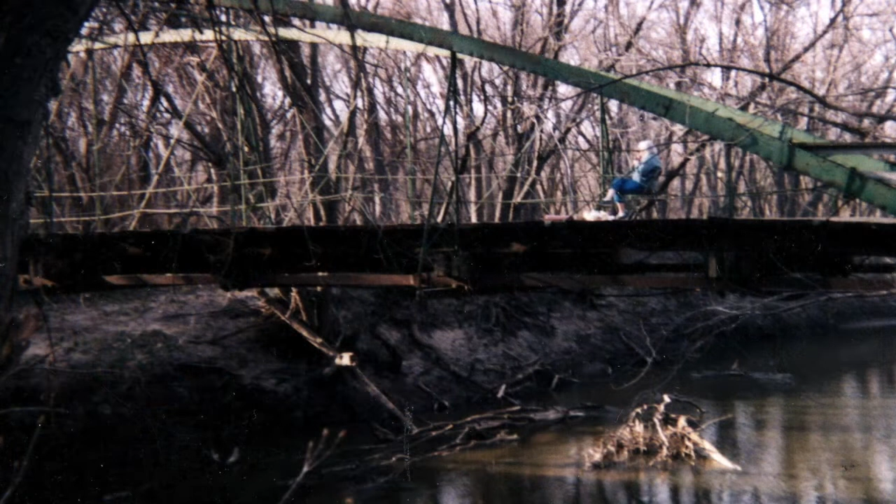When the McIntyre Bridge was flooded off of its piers in August of 2010, probably Friday the 13th, there was 10 inches of rain, and the story goes that trees threatening a bridge upstream were being plucked out and pushed back in the river, Iowa, and tiling, flooding, clearing fields all the way to the riverbank.

So our bridge lost it, and my dad was lucky enough to be up in a plane flying over as Laren and I were traipsing through muddy trails to get down to see if the bridge was still there. And it was not, and that's how we got started.

So all of the sources, Bridge Hunter, etc., pointed us to Michigan. And in Michigan, we were pointed towards Vern Messler and Nathan Holth. And they came to Iowa and talked to our friends group, and we had a good meeting on the fact that we could save our bridge, even if it fell in the water.

The expert that we really needed, however, was Nels Raynor of BACH Steel. We needed an iron expert. Our county engineer had said that one cannot weld old iron and no one rivets anymore, and this bridge cannot be saved. That was before it fell down.

But we got the bridge out, and we took it to Michigan. We brought it back from Michigan because the state threatened us with losing our status on the National Register and not being eligible for grants, and then they took that away from us anyway because they said when the bridge was moved, i.e. being pushed off of its piers, it lost all of its status. And that was a bummer.

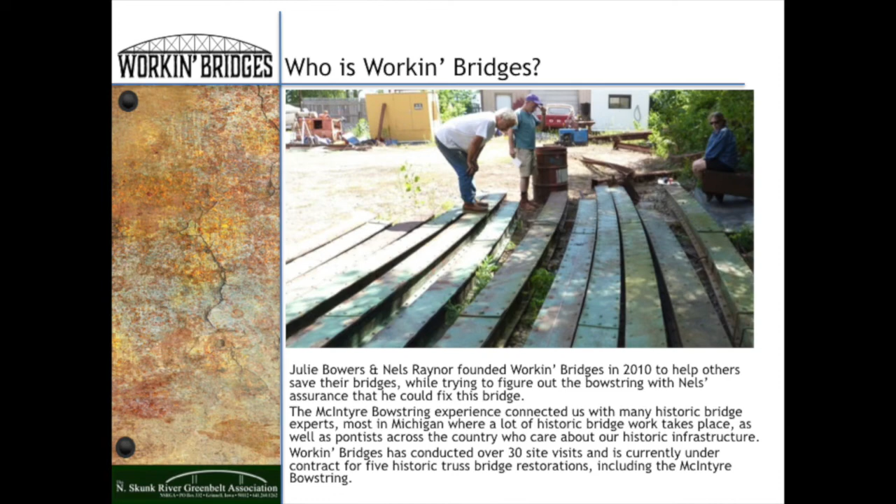So Nels Raynor of BACH Steel and myself, Julie Bowers, founded Workin' Bridges in 2010 under the auspices of the North Skunk River Greenbelt Association.

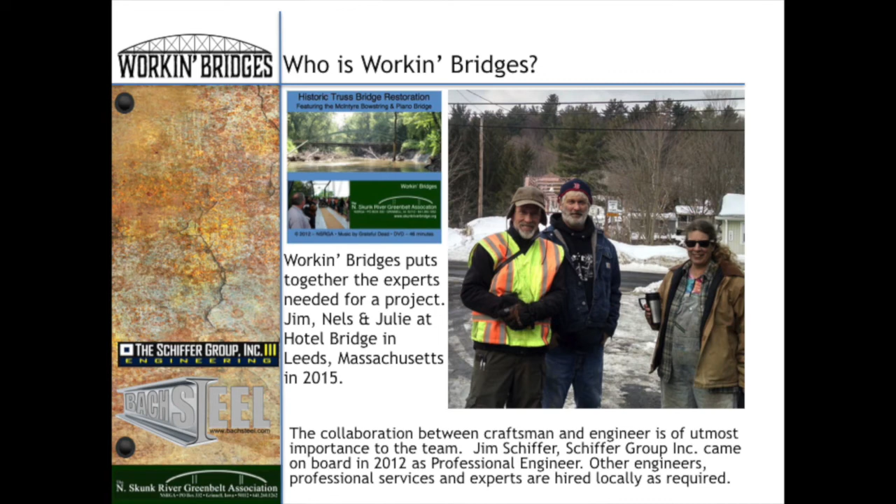And we did site visits, and we did estimates and timelines. We hooked up with an engineer, Jim Schiffer, who really gave people what they needed if they were going to try to save a bridge at that point, which was a pretty accurate anticipation of the cost needed for a bridge, if they could fund it in the first year. If it doesn't get funded that quickly, well, forget about it.

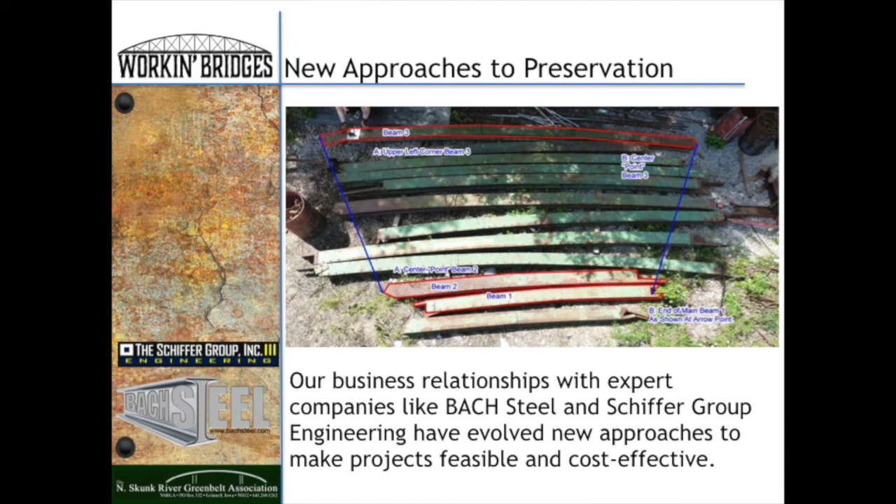So we had a nonprofit. We were working with experts, and we did all the usual things. We held bridge fests and events, and we tried to raise money.

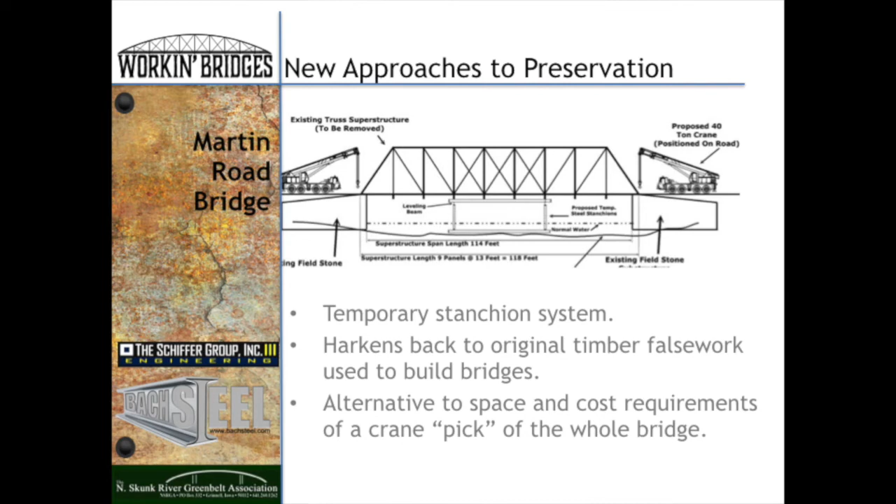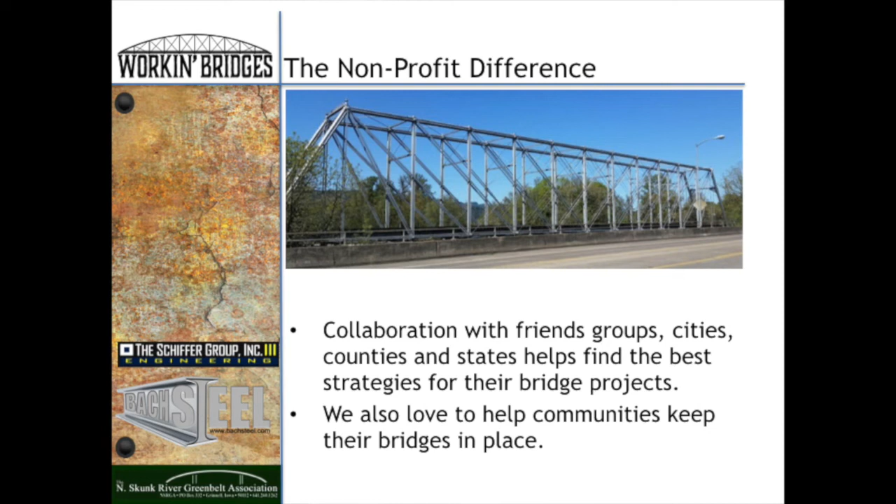But in 2015, we found the Hayden Bridge. It was threatened with demolition. It was in Springfield, Oregon, in Lane County, just outside of Eugene and over the McKenzie River. And we thought we would be able to help people in this community save their bridge. We ended up saving it ourselves.

Oregon is very committeeized, is how I put it, and the grassroots efforts have been somewhat squelched for these committees that then work with the local governments. We were never able to get an audience with Lane County unless we went in for 3 minutes at the beginning of a meeting in order to try to tell them what we were doing. So we had very little political support, even though what we have there is one of the oldest bridges in Oregon, and certainly one of the oldest train bridges that is still standing.

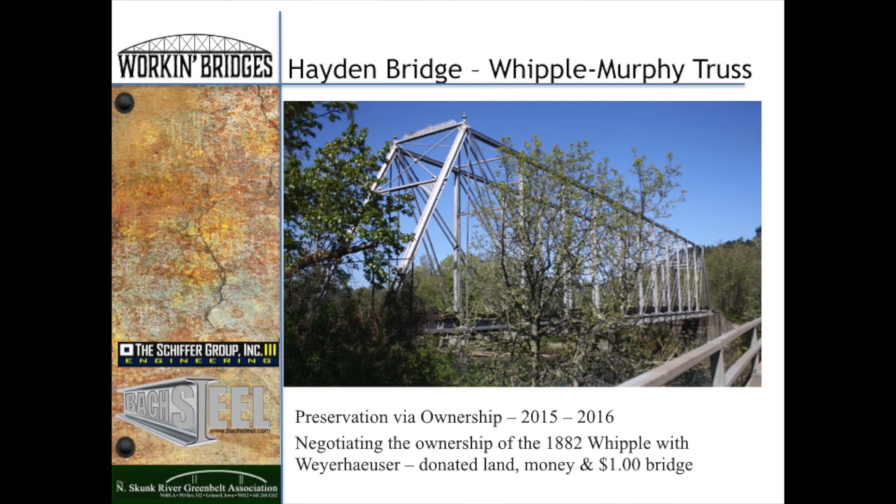So our approach to preservation was to try to help others. We saved another Oregon bridge, the Portland Waterworks Bridge. That was no longer needed to transfer water from the Sandy River to Portland. That is in Delaware, as well as our bridge, which is now the heart of Delaware's newest state park.

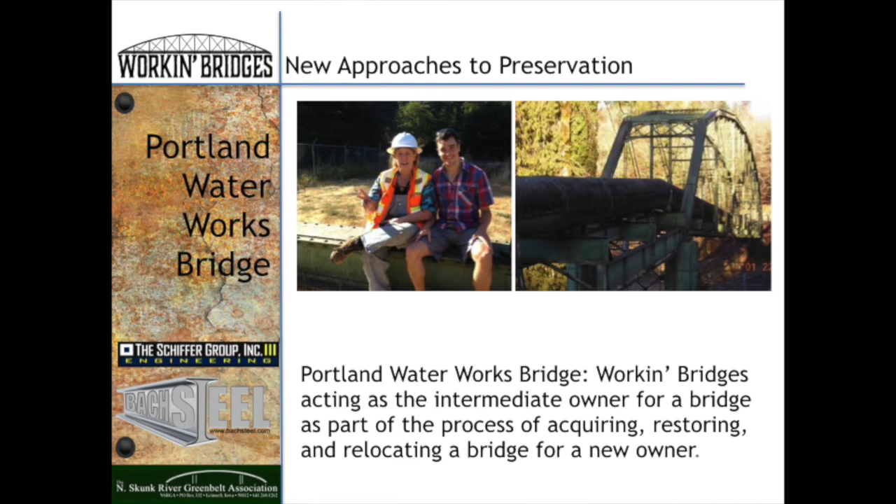We purchased this wonderful bridge, and we proceeded to figure out permitting with Lane County, which ended up with no permits needed. They couldn't quite figure us out ever.

Such wonderful views. That's where the horse went across during the movie Shenandoah, right in the opening credits. They rigged from the bottom of the bridge.

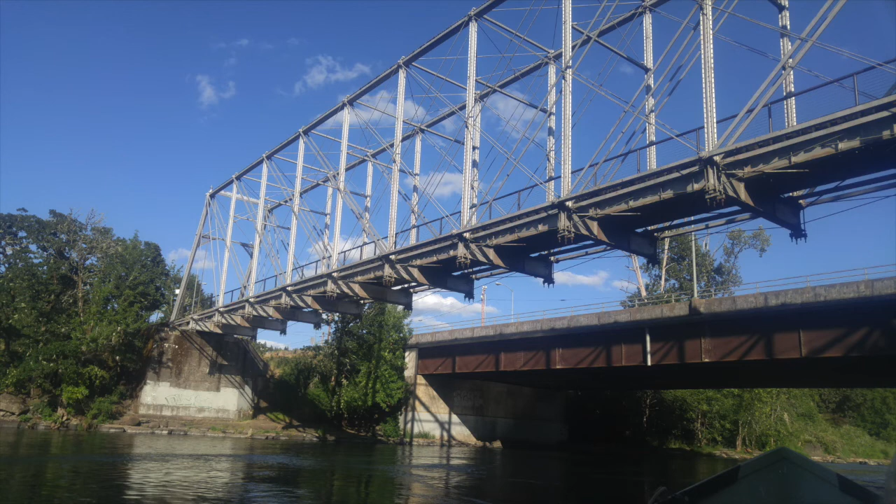It's a beautiful place. So we started doing our research. We made a site visit, Nels and I, and put together a package. Tried to figure out what the bridge needed, and it really didn't need any ironwork, if you will. It just needed deck and rail.

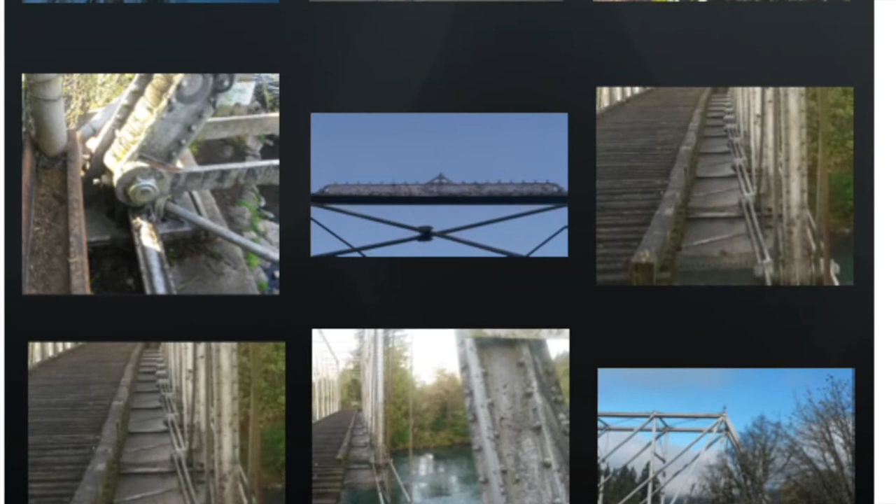The story goes that in 1868, David Reeves recruited noted bridge engineers Thomas C. Clarke and Adolphus Bonzano to establish a bridge design construction firm that would offer bridges made from Phoenix iron. This was called Clarke, Reeves and Company. Phoenix iron had been invented and patented in 1862 by Samuel Reeves as a wrought iron alternative to the cast iron compression columns that were used in building and bridges at the time.

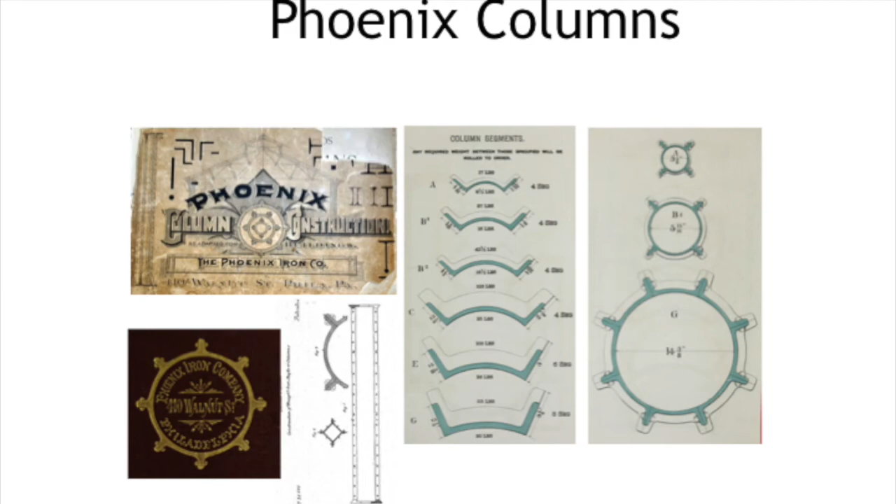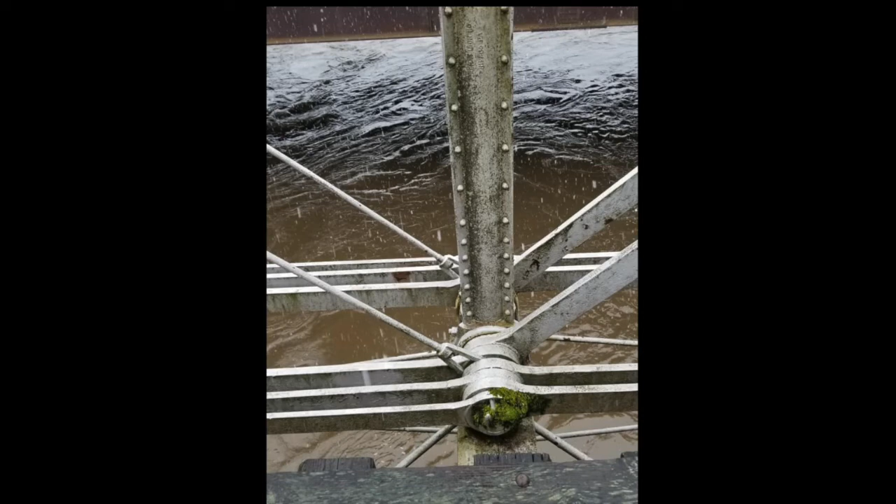Here is an example of the Phoenix column as manufactured by Phoenix Iron Company in Phoenixville, Pennsylvania. Then after 1882, when the Hayden Bridge was built, they changed their name to the Phoenix Bridge Company in 1884.

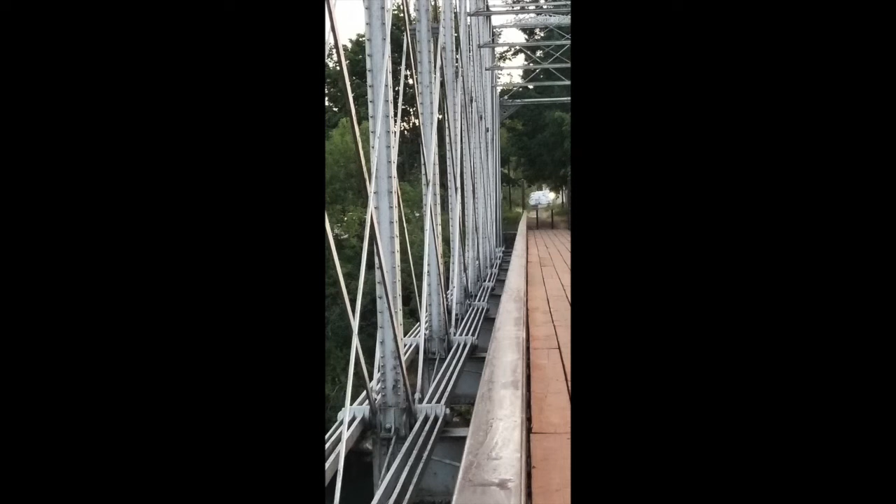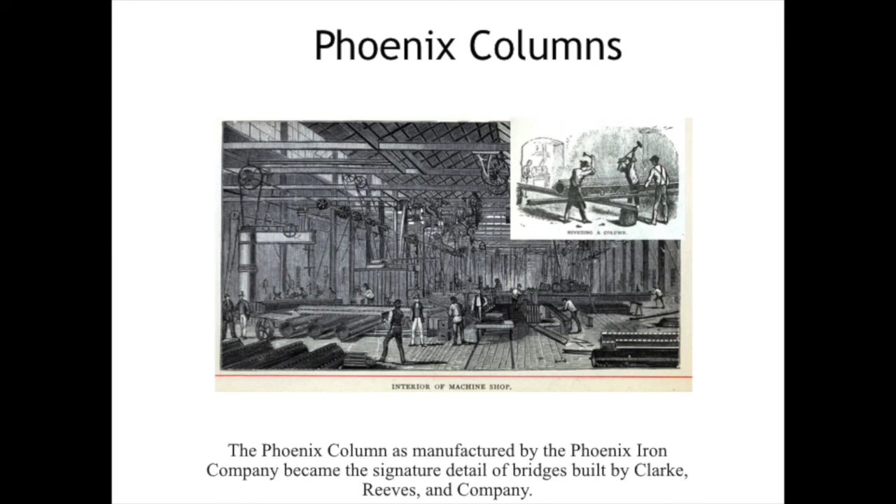Our Hayden Bridge was originally on the Transcontinental Railroad, replacing a wooden trestle in 1882. It was then dismantled in 1896, and I'm going to let Melody Ann Minks pick up the rest of the story.

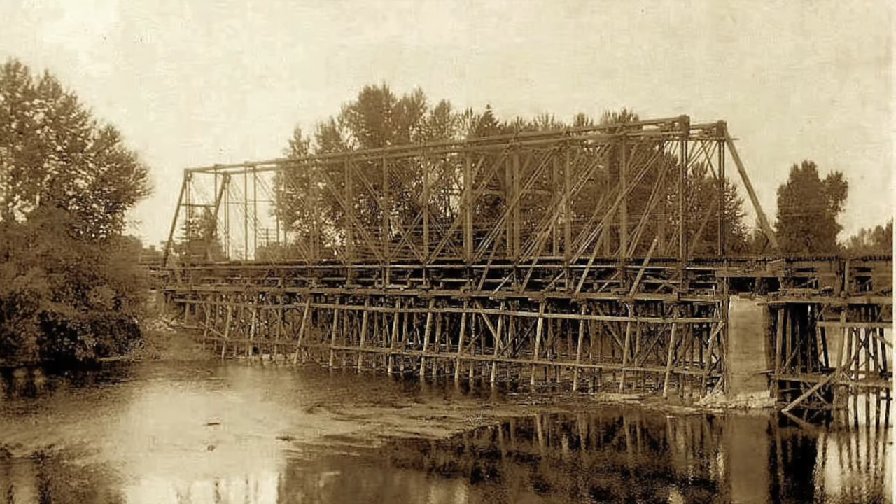January 3rd, 1900, Daily Eugene Guard, Mohawk Branch Railroad. Notes from J. Swafford: 1869 was when a timber bridge was first put over the Bear River in Corinne, Utah. It was replaced with the 1882 bridge until 1896, when it was dismantled. D. McCarty of San Francisco came in on yesterday's train to commence work on the McKenzie Bridge at Hayden's.

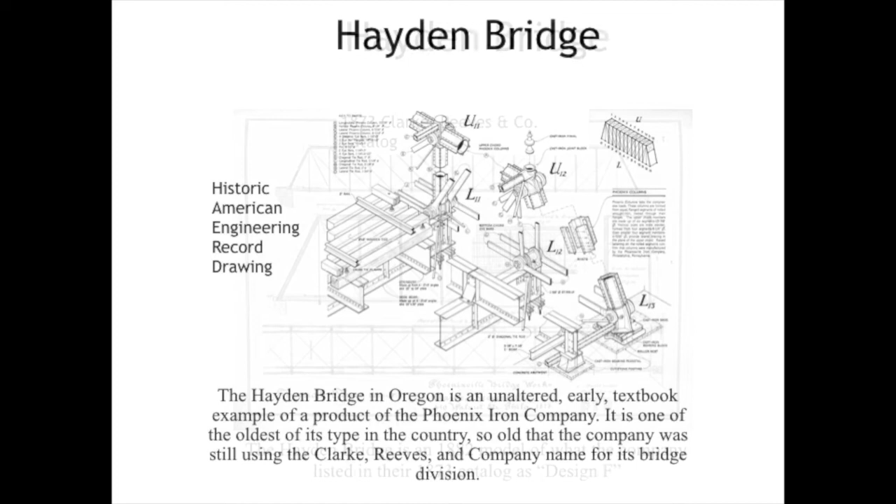May 28, 1900, Morning Oregonian, Portland. To build railroad bridge. Trains will soon be running on the Mohawk Branch. Eugene, May 27th. 11 skilled mechanics arrived here yesterday and have gone to Hayden Bridge, where they will put together and erect the new steel railroad bridge across the McKenzie at that point. This is the principal bridge on the Mohawk Branch line of the Southern Pacific.

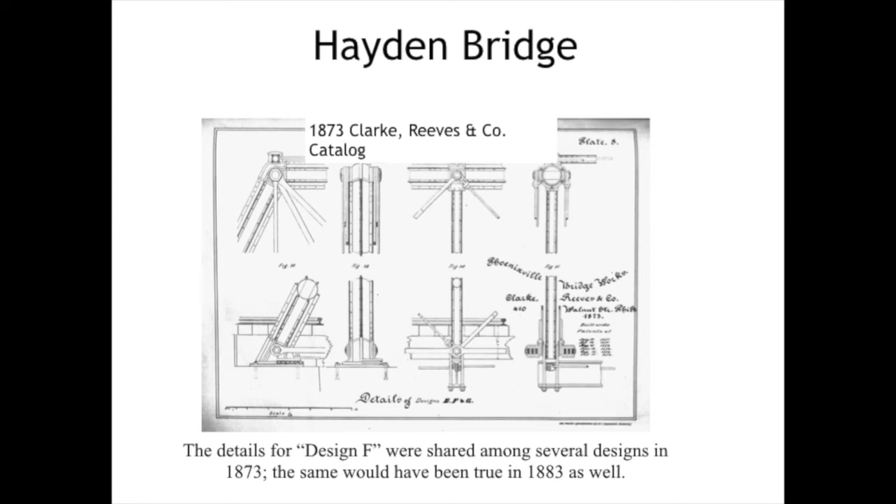There is a smaller bridge to be built where the road crosses the Mohawk. When these bridges are completed, it will be but a short time until the track is laid and trains will be running to the terminus in Wendling, where the big mill of the Booth Kelly Lumber Company is situated.

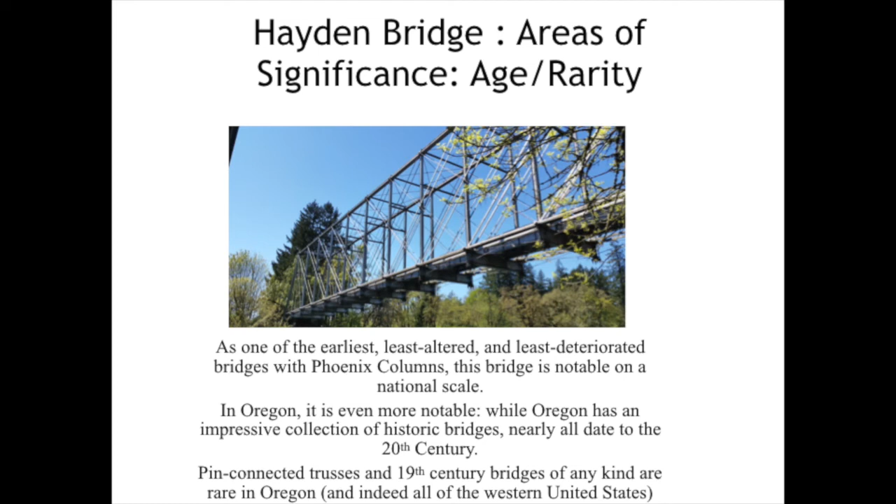June 5th, 1900, Eugene Daily Register. All around the town, the day and evening news. Things we know and facts other people tell us about as we go our rounds. O. Crossfield, representing the Thompson Bridge Company, has commenced work on the steel bridge for the Mohawk Railway. Mr. Crossfield has about 20 men on the construction.

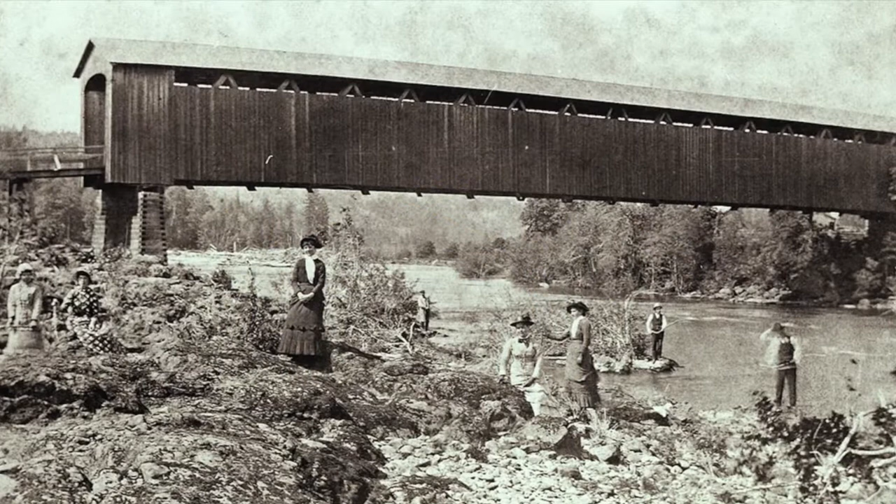May 1st, 1900, Morning Oregonian, Portland. Mohawk Valley Branch. Archie Mason, a Portland contractor who has charge of the construction of the new railroad up the Mohawk River in Lane County, is in Portland visiting his family. He has now 200 men and 60 teams at work on the grade, and expects to finish it to the new town of Wendling by June 15th.

The road crosses the McKenzie River once and the Mohawk twice. At the McKenzie crossing, a fine steel bridge is to be built, and about 40 men are now at work on the concrete foundations. May 14th, 1900.

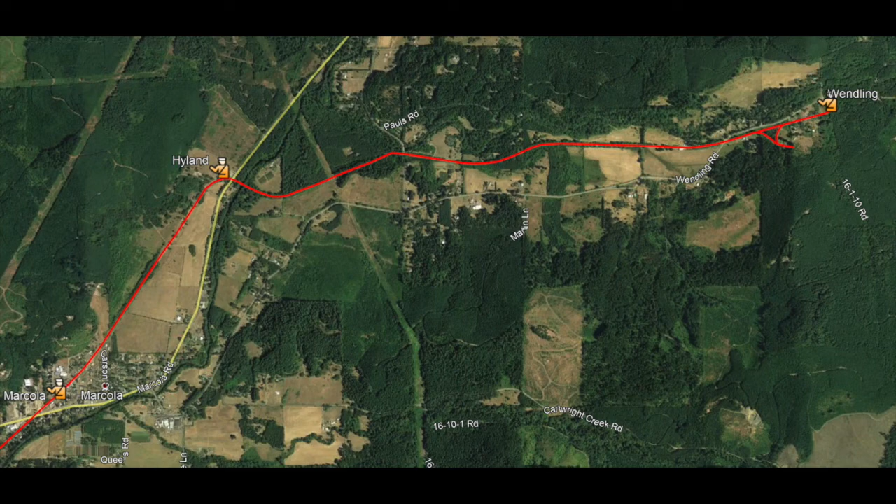Daily Eugene Guard, Mohawk Extension, SPRR Bridge. The great depth of the McKenzie River, 50 feet at the point where the Southern Pacific Railroad Bridge will be built on the Mohawk Extension, precludes the use of false work on which to rest the structure while it is in the process of construction.

Wire cables from pier to pier will be supported with pontoons moored in the river by steel cables fastened to the banks on either side above. Work will be commenced on the bridge Thursday of this week. The material, 9 carloads, has already been delivered in the Springfield Railroad yards. The first bridge across the Mohawk, a span of 100 feet, is also at Springfield, loaded on 3 cars. It is a combination wood and iron bridge and came from Corinne, Utah.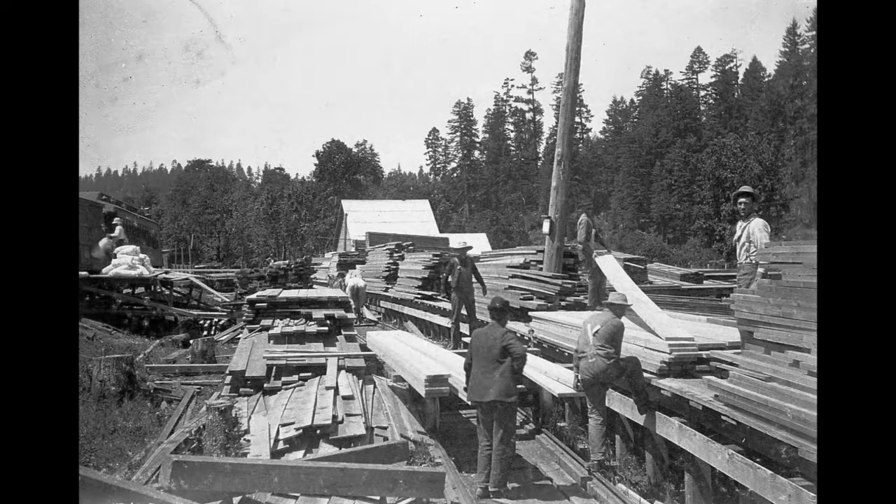Railroad Bridge. The railroad bridge for the Mohawk branch of the Southern Pacific is progressing rapidly. The piers have been built on either side of the river, and the trestle work built up to the piers. The main span will soon be put in, and the bridge will then be finished. A number of carloads of supplies have been taken to that point. The track has been laid to the bridge, but the road is not yet ballasted.

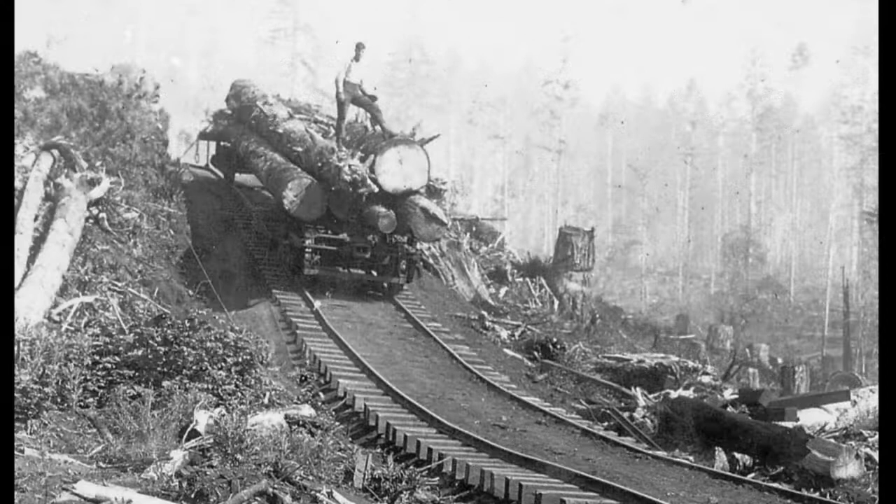April 17, 1900, Daily Eugene Guard, Mohawk Railroad. Contractor Mason is pushing the work rapidly. Bridge material expected daily. 4 carloads of horses, scrapers, etc. arrived Saturday night and were at once sent to the front.

3 more carloads of horses and material arrived and were sent to the front last night. The road has an appearance of activity more evident than at any previous time since the work began, and the grading will be pushed with all possible speed. The material for the railroad bridge across McKenzie is expected to arrive at any time. The first shipment, consisting of 9 carloads of steel, has left the Sacramento shops and is on the road. The bridge complete will amount to about 20 carloads.

Special to the Guard, Springfield, Oregon, April 21st. The first installment of the steel bridge for the McKenzie River arrived at Springfield yesterday, consisting of 3 carloads. The balance of the bridge will follow rapidly. The piers are nearly completed, and in 10 days active work will begin on putting the bridge together.

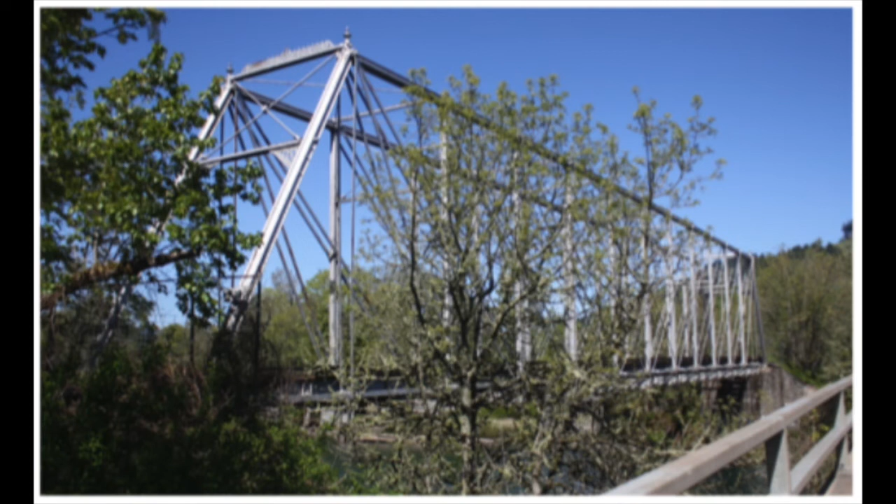The bridge has been removed from the Central Pacific Railroad, being shipped from Corinne Station, 20 miles west of Ogden, Utah. Archie Mason, the contractor, received another carload of horses today. It is reported that he expects to receive 60 Japanese to arrive by this evening's train to be turned loose on construction work. June 19, 1900.

Eugene Morning Register. All around the town. The day and evening news. Things we know and facts other people tell us about as we go our rounds.

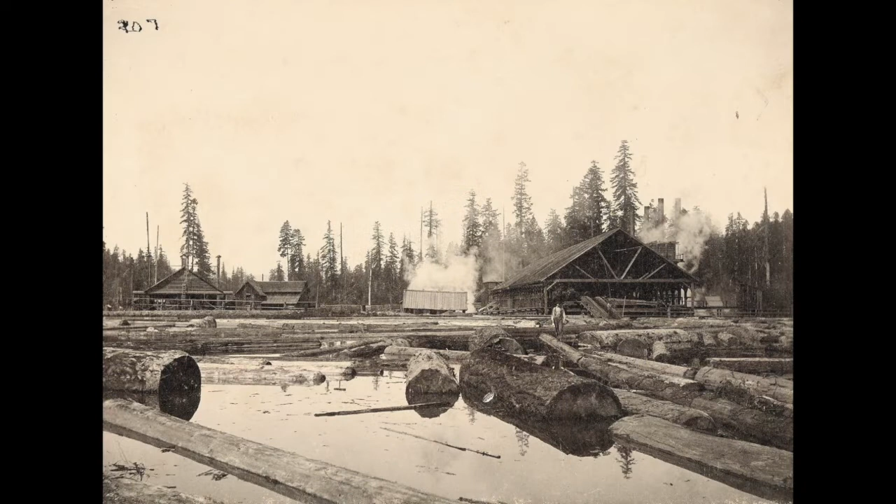G.O.T. Hall, Jr. was over the line of the Mohawk Railroad Sunday. Mr. Hall says all the false work for the steel bridge to span the McKenzie River has been completed, and the contractors expect to have the steel bridge finished by Saturday. It will require about 2 weeks' work on the grade yet.

June 28, 1900. Daily Eugene Guard. Bridge nearly completed. The steel railroad bridge across the McKenzie River will be completed before noon tomorrow. This is a fine structure.

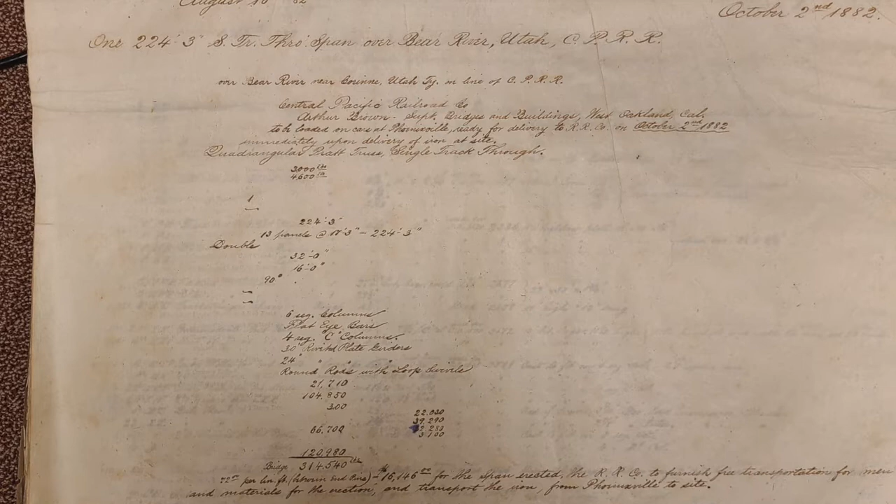SP Mohawk Branch. McKenzie Bridge about finished. Natron Terminal may be abandoned for Wendling. The McKenzie Bridge on the Southern Pacific Mohawk Branch was swung from the false work Wednesday and will be ready for trains in a few days.

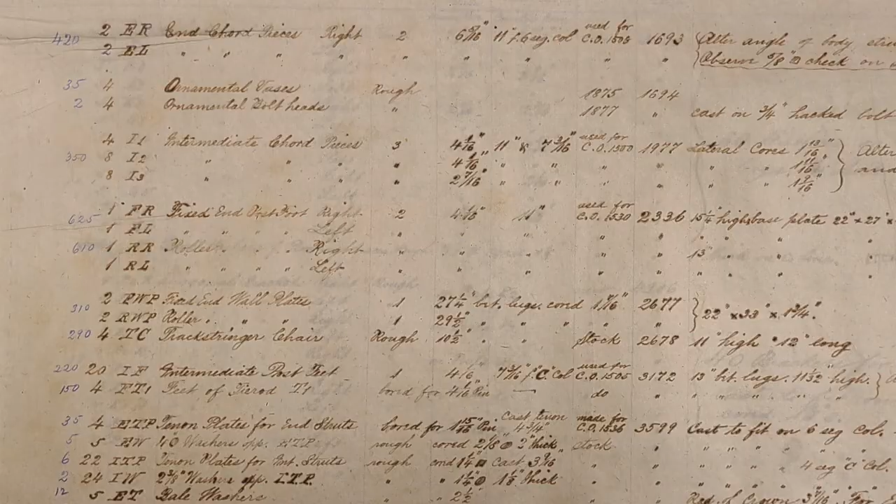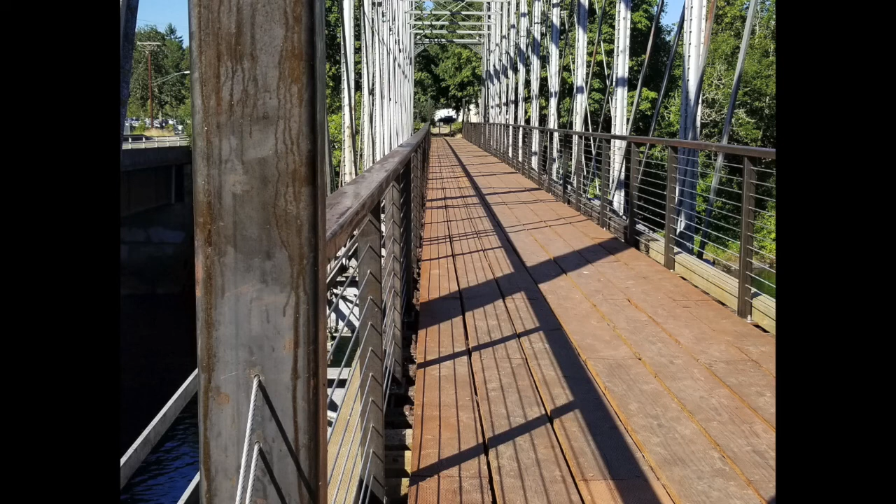This bridge is a single-span steel bridge, being the only one of its kind on the Southern Pacific lines in Oregon. The grading on the ground is nearing completion, it being estimated that about 15 days' work will complete it. The track-laying gang, consisting of about 100 men, will arrive and commence work in a few days. It is thought that trains will be in operation to Wendling by August 15th.

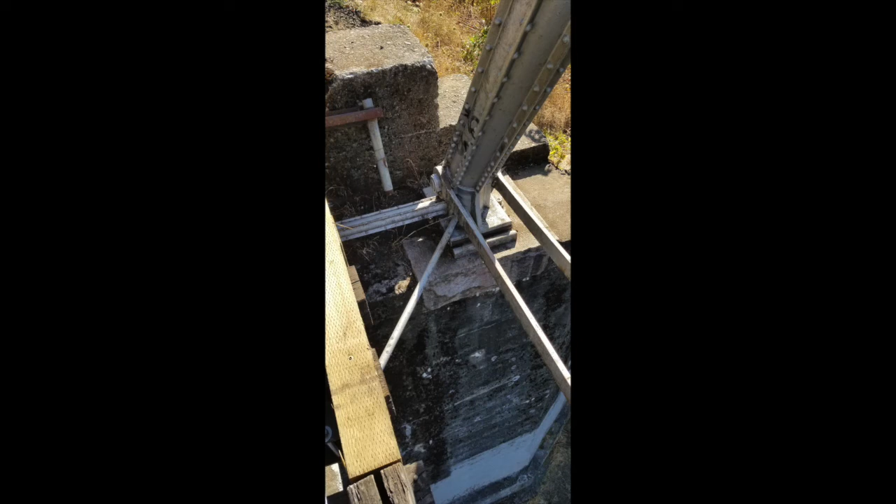A report is current that the Natron Terminal will be abandoned, not using track east of the Mohawk Junction. Instead, the trains will make their terminal at Wendling. This arrangement will leave Natron without train service. Those who know say the road from Springfield to Natron never paid operating expense.

There are no news concerning the railroad bridge across the river at Springfield, but general opinion is to the effect that it will be several years before this bridge is built.

Morning Oregonian, Portland, grading the Mohawk Branch. Work is expected to be completed within the week. The grading of the Mohawk River branch of the Southern Pacific in Lane County will be finished next week, according to Archie Mason, the contractor, now in the city.

The company is erecting a $50,000 steel bridge and several stout wooden structures along the line, and when these are done, track laying will be put through with vigor.

June 29, 1900. The Mohawk Railway. O. Crossfield, representing the Thompson Bridge Company, was in the city yesterday making arrangements for teams to transport all but 12 of his bridge forces to this city today en route to their homes in San Francisco. The remaining workmen will attend to the few minor details of finishing up the contract. The steel work on the bridge will be finished sometime this forenoon.

July 8, 1900. Eugene Morning Register. Rapid progress. The large steel bridge across the McKenzie River constructed by the Mohawk Railroad branch is completed, and work will soon be commenced on removing the scaffolding. The company is now building its first bridge over the Mohawk, and the grading of the entire roadbed is virtually finished. December 18, 1907. City News.